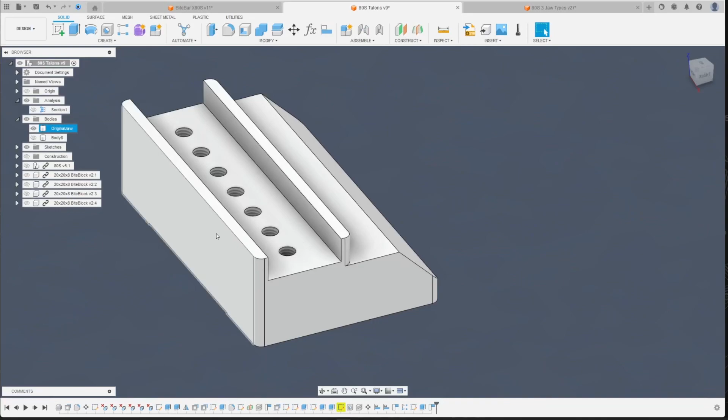So what did I do in preparation? I put in my jaw model because my origin is the vise. G59 work offset is what I use, and it's basically here in the middle of the vise, and this is Z, so it's on this plane right here. So that's why I always model in the jaws. This makes it much easier to avoid cutting into the jaws, because that's why I'm making these jaws, because I did that a couple of times. So I'm trying to learn a better work process.

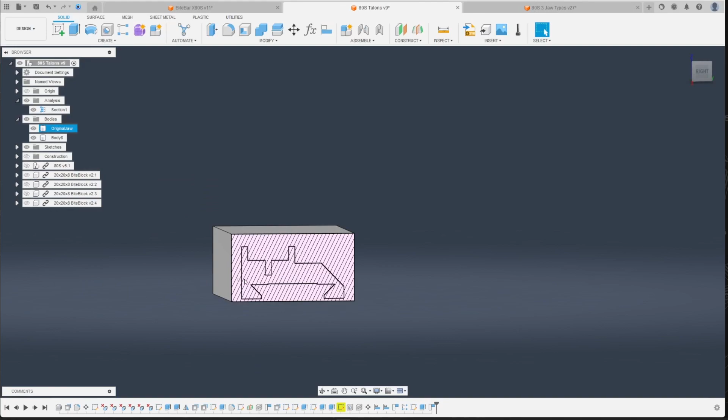And so I put in my jaws and I modeled the stock that I'm going to be using like so. First op is going to be from this side, so this will be Z0. Like this exactly is going to be op 1, so Z goes up. This is going to get faced off, this is held down by like 4 millimeters, and these jaws need 3, so that I've got some spare room there. I aligned these so they sit correctly against that, and that is it.

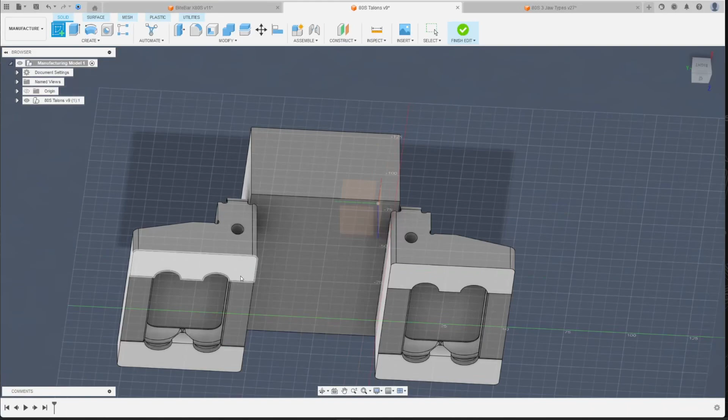So let me pop into Manufacture, and I'm gonna show you my process of how I do this. First I know this will require 2 ops, so I'm gonna make 2 manufacturing models. I'm gonna edit manufacturing model number 1, and I'm gonna get my origin here. I always start a sketch on the face here, that's the precision face basically. Then I project these 2, draw a line, point in, oh, that would actually be wrong, find the middle, boom, done. Finish sketch, finish edit. We've got model 1 done.

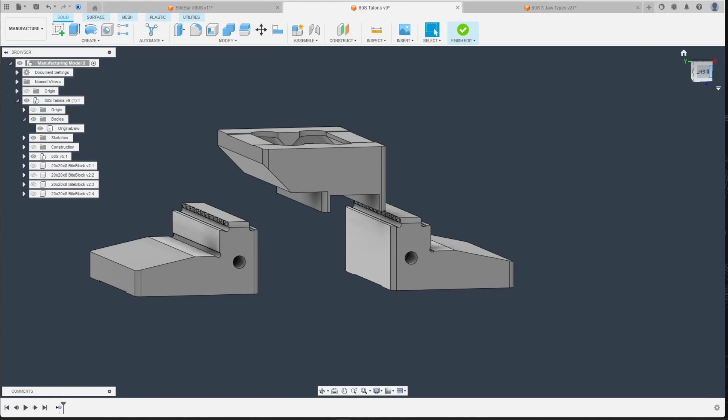Let's go into model 2, edit that, and now here it starts to get more involved. We're not gonna be using the stock, so I'm gonna remove it completely. I'm gonna work with in-process stock, and don't move this model. The model has to stay at the same spot, otherwise that's not gonna work in between the setups. So I'm gonna take the align tool, and align the jaws to here, and now they're gonna be 0.3 millimeters off, because this surface is lower than this, and it's gonna be sitting on this, so that's not gonna be correct, but I will move that later.

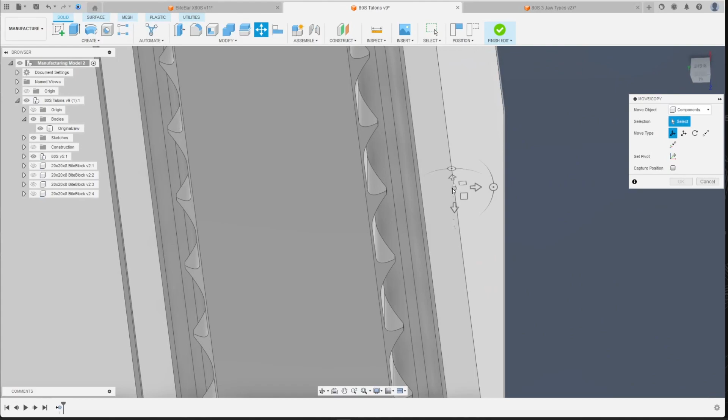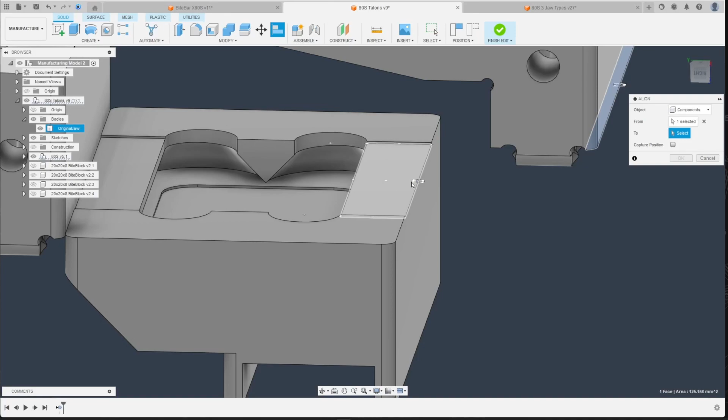So I'm gonna align these. Actually aligned that wrong, okay, sorry for that. Let me just quickly move this. Why is it so weird? Give me a second. Oh, sorry, I picked the wrong tool. I didn't pick align. That's why it was acting up. Little tip: if you hold Alt while selecting, it makes it easier to select these spots where it might pop into here. It doesn't work as well now that I'm showing you, but it usually does work great.

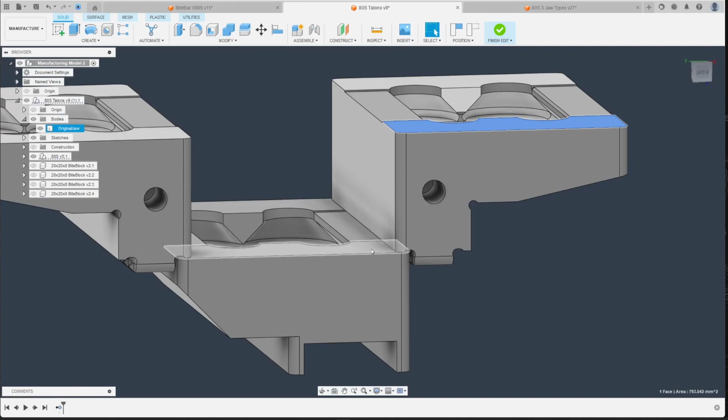Since there's going to be some heavy roughing, and I don't care about the surface of these much, I was going to hold them in the serrated jaws again. Actually, scratch that, sorry. I'm going to hold these on the smooth side. We've got 20, so we need to move this 4 millimeters. Will that work? I don't think I'm gonna be able to make this spot. Let me see. I think that's actually doable. Worst case, I change that later. So it's gonna be held like this. There's gonna be a parallel right here. It's a 21mm tall parallel.

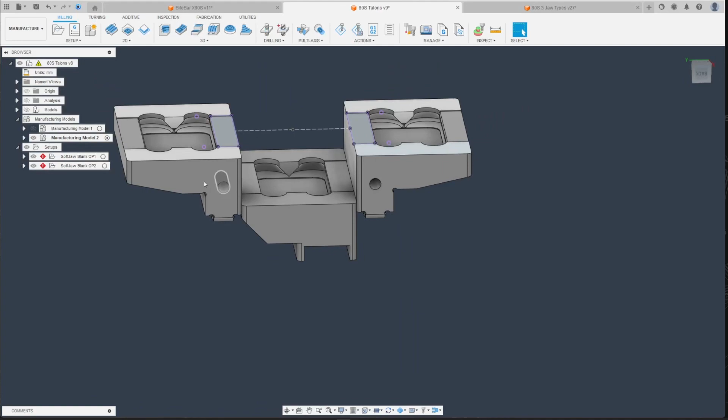Again, I add the sketch. I project these, construction line, point in the middle of that, finish, we're done. So that's model 1, model 2. That is the correct way. The model itself doesn't move, only the jaws and the fixturing around it does. And let's pop into here. I've already got this set up. I copied it over, but in short, I pick my machine. I select orientation. I go origin, selected point, select the WCS origin.

I'm actually gonna select the manufacturing model here first because it won't let me without it. This usually gets automatically selected, but since I already copied it over, it doesn't. So here we check and it's on the flat bottom of the jaws. That is correct. We select the model, so I'm gonna have to get this like so.

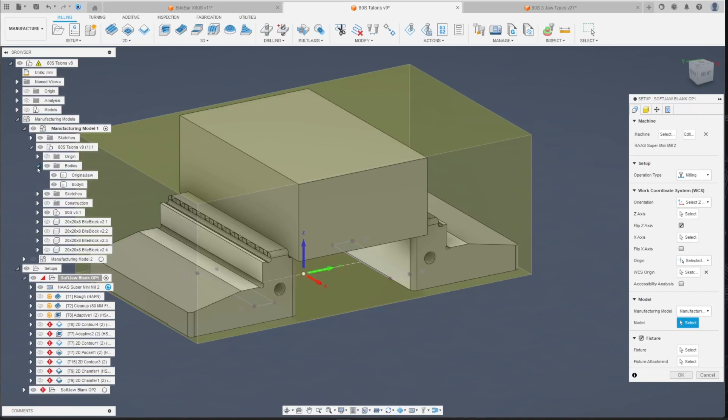We do from solid, so hide the model, select original jaw, and then stock. I'm gonna go from solid, select, and I'm gonna select the model stock that I already modeled up. And fixture, we can select these just cause it's better in case there would be any kind of hits with like a drill or something. And then my WCS is G54. That defaults to G54, but I actually had it changed, so I wanted to check. And that's everything. So we do OK.

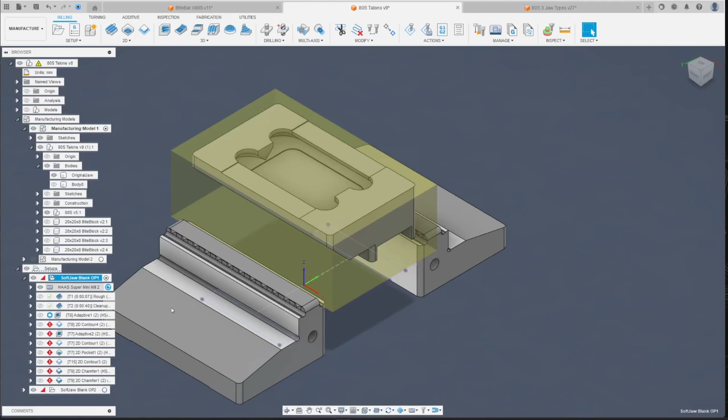And let's see. We've got a ton of errors, but first off, it gets roughed with a face mill, 50mm. It gets cleaned up with a large fly cutter style, just one insert in like a big face mill, 80mm face mill. That makes the surface super nice. Then there's an adaptive with a 10mm tool. Some helix there. Not much more to say.

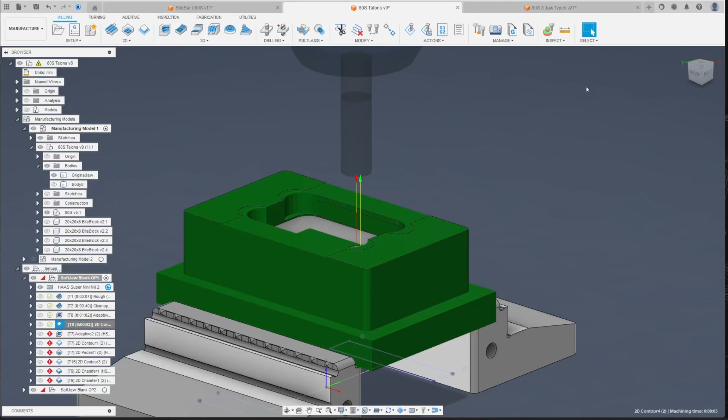Then we've got a contour with an 8mm. I believe that was this one. No, actually, sorry. That's the 10mm tool. That is the outside profile of the jaw. So I'm gonna select silhouette. I'm gonna do outer loops. Okay, see, that will go around.

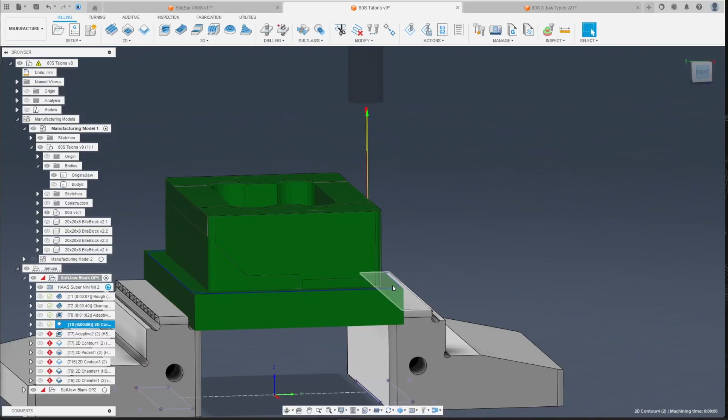I actually do want to change this up a little bit because once we mill this, you can see the depth doesn't go all the way down to the model. So I'm actually gonna change this up a little bit, and I want to set the bottom height to model bottom. I'm gonna do minus 0.5, and hopefully that picked correctly. Yep, that worked. Okay, here I'm gonna do the same. Heights, model bottom, minus 0.5. Done. That will contour beautifully around that.

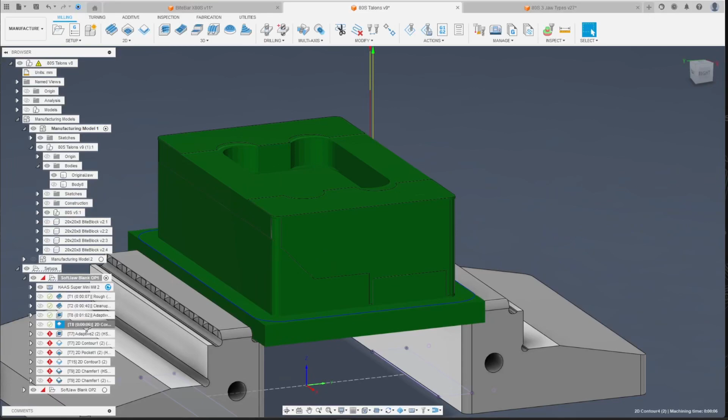So then, adaptive. Oh, right, top reference. I'm gonna select this as the top. I'm sorry I'm going through this fast. Because I already have it set up, I'm trying to not waste much time. But the way I have this set up is so it doesn't try to machine these parts or these flats. I have the top set to here -5, and that also saves me time that it doesn't try to do stuff here.

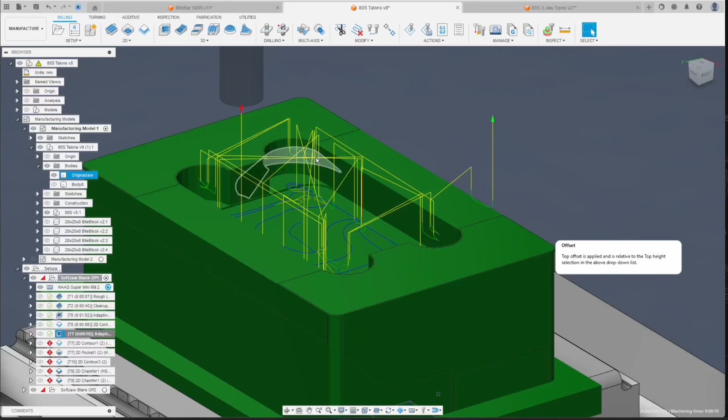Let me actually show you how it looks if I do 0. You see, it has these weird moves around. Like, what the hell is this? Why would you machine this little part? It's completely useless. So that's why I'm trying to keep it under control a little bit by setting the top to -5. There we go. That's a lot cleaner.

If you really wanted to save time, you could do most on the stay down level, and instead of retracting a couple of times, it's just gonna move like this. Might save you a few seconds, but it's nothing significant. Here you can see also there's some weird links and stuff, but I don't care, it doesn't really mess up the part in any way or mess up the surface.

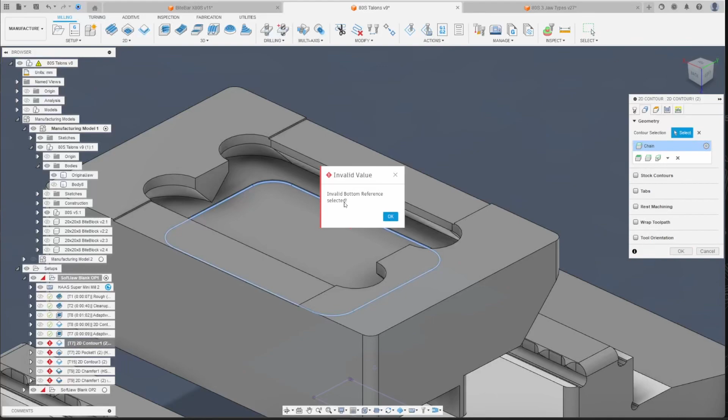So then we have the contour, and that will be this pocket, and the bottom will be this. Actually, I am incorrect, sorry. I know I'm jumping all around this, but I really don't have much of a choice. There we go. So it's this, and the bottom is going to be this spot. Why did it not mill this part? That's weird. Oh, because I did not select it. I'm gonna select close chain here. That's gonna fix it. Yep, there we go.

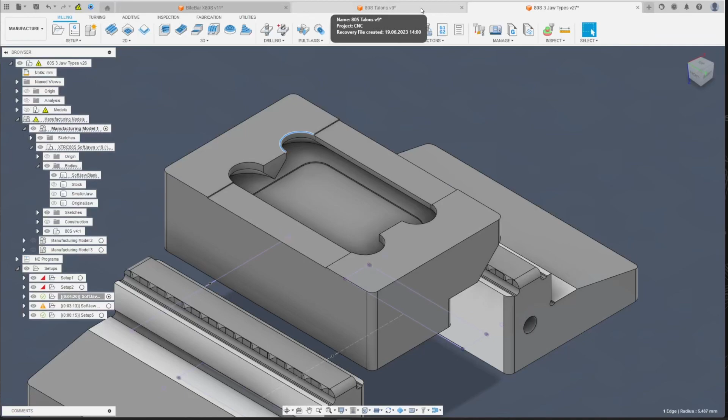That's perfect. Let me actually do a quick check. I've got this 5.5 basically. Yeah, good. That's the CAD for the soft jaw that I've already machined, so I'm just basing it off of that. Okay, then pocket, I'm gonna select this. I'm gonna also check, because maximum step over is 4. That is stupid. I'm gonna set it to 7 because it's an 8mm tool.

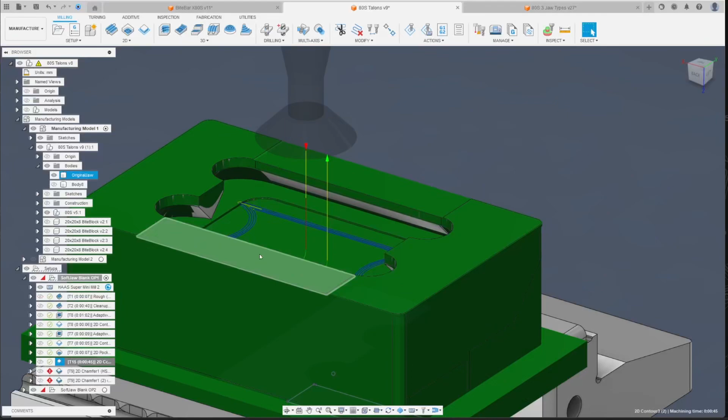I think it touches the wall slightly here. I'm gonna have to watch the simulation later. But I was setting the step over wrong for pocketing. And then we have the interesting contour here. I will show you that in the simulation in a second as well. And we've got some chamfers. I believe they were something like this. Okay, guess that's why I split them up, right?

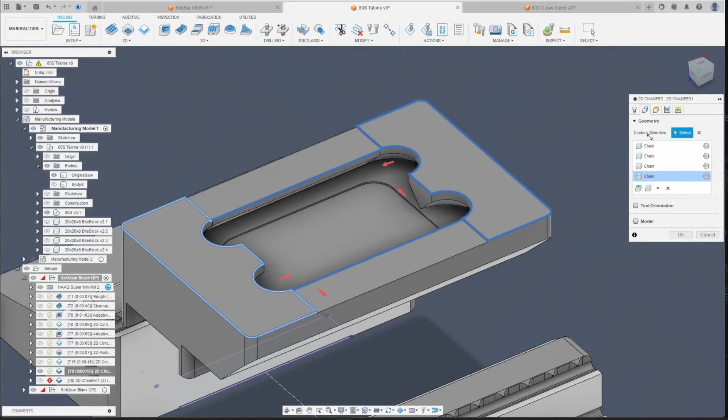That's a very big chamfer. Let me check really quick. Sorry, I'm running around so much with this, but I am trying to remember because I haven't had this file open for ages at this point. So this is gonna be the outside chamfer. Don't do that. Okay. Sometimes Fusion doesn't want to listen, so you gotta, you know, kind of force it into listening, like so. That should do the chamfer correctly.

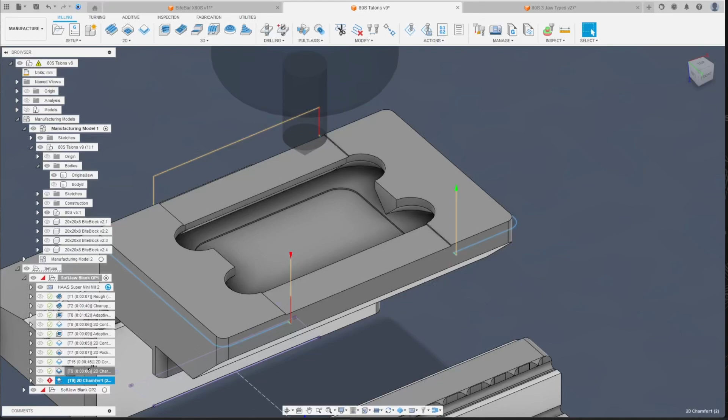Yep, that's good. I will do the small chamfer on this whole thing, basically. Let's see what Fusion thinks of that. Yeah, that's what I expected. It's fine. It doesn't matter much. End mills don't leave much of a burr. So let me show you the simulation because I went through that very fast. So I see I've got some collisions, but I'll show you.

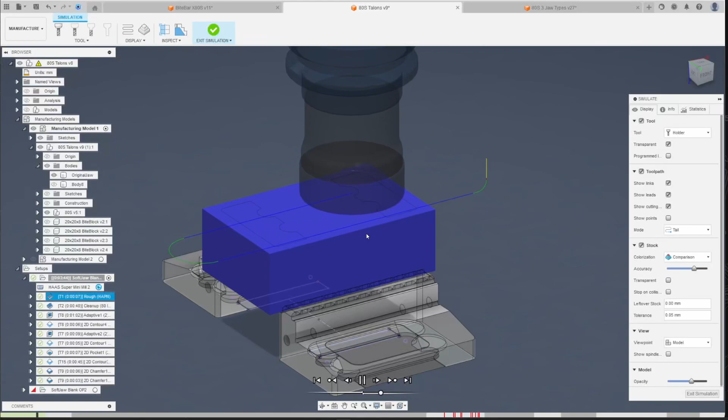So here's my facing op. It's just like a very small depth cut. I'm not sure, I think it's like 0.5 millimeters or a millimeter. So not heavy at all. 7 seconds, easy. And this is the cleanup. I'm leaving 0.1 millimeters from the face, and that then gets faced off like so.

Then I have the adaptive with the 10 millimeter tool. That's a fairly heavy cut. It's 15 millimeters depth of cut, and it's 5 millimeters width of cut. So that's pretty solid. It sounds amazing though. This tool has been seriously great. And as you can see, this is still not finished. I have stock to leave set on there, so I'm gonna speed this up a little bit because it's gonna take a second.

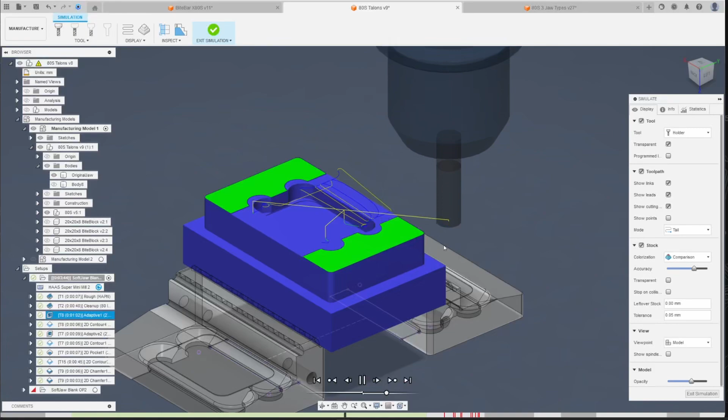See, there was this weird non-cutting jump. Then it does the full depth. And okay, let me slow down here. Why is it saying the shaft collides? Oh yeah, I got it. Oh my god, that is a solid 0.5 millimeter of collision. I'm gonna change that in a second. Let's say that went well. It probably wouldn't have, but I'm gonna change that once we finish watching.

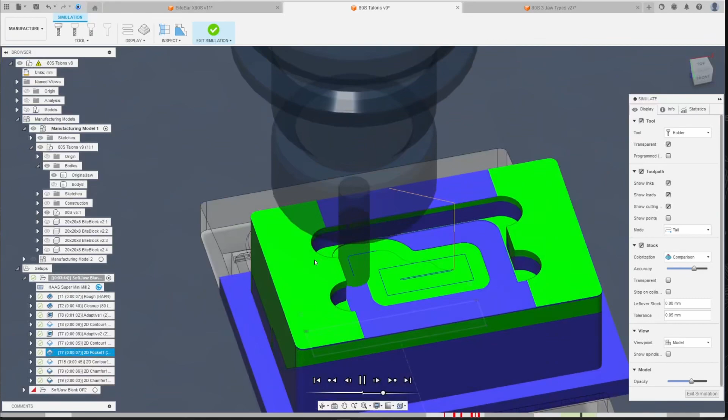So here I'm doing a little adaptive that clears out anything that the 10 millimeter left behind, and then a contour all around this. Then a pocketing op. It's gonna slightly hit that, but I think that should be no problem. Okay, and then this crazy thing. Don't get inspired by the way I did this, because I am sure it's wrong in many ways. Let me pop into the op again. I got kind of messed up.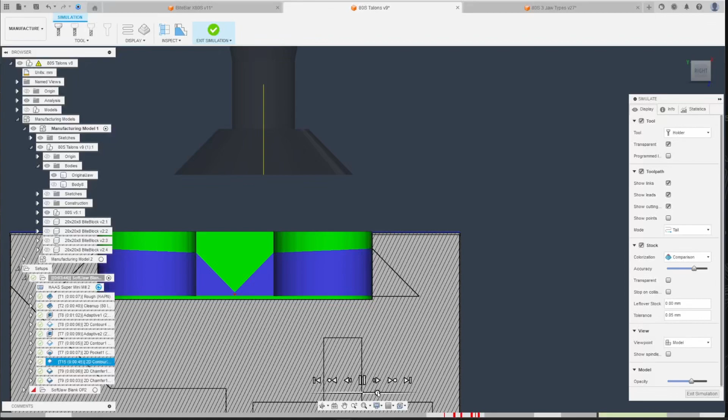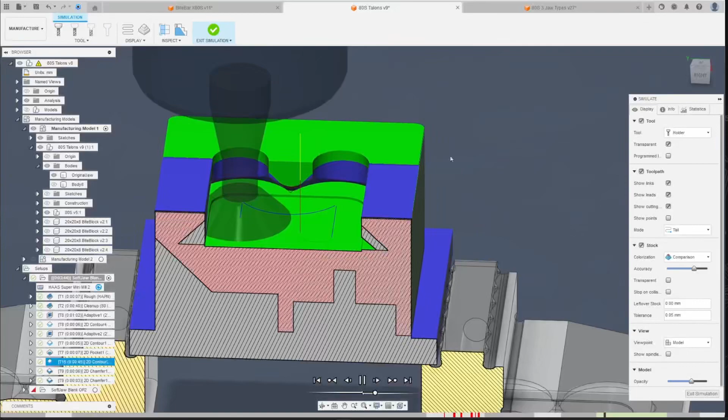I'm gonna do a section analysis. I'm gonna set it to half of that. Let me turn that on. Okay, so check this out. This thing here goes down. Jesus Christ, why is Fusion so laggy today? And then it starts cutting like so. Just fairly small step over. It's not crazy, but here you can see it isn't the best for the tool to go straight into a corner. So I'm slowing down the feeds. I'll show you how to do that in a second. In these corners, I slow them down, and it does a couple of passes. It's aluminum, so I can afford to do stuff like this, which is pretty stupid.

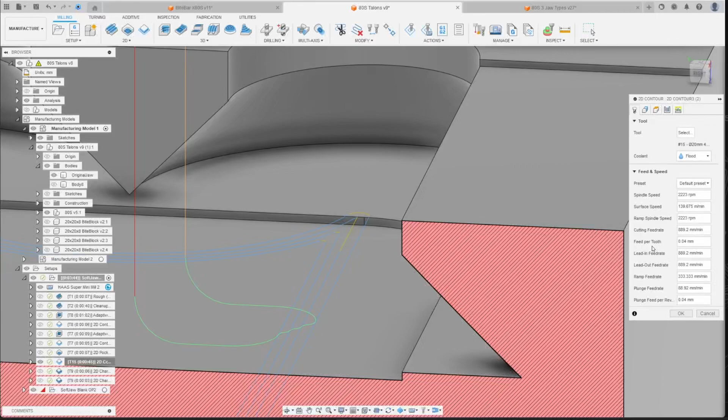I'm actually going to do a little edit, I believe. I could add a few roughing passes because I want to have it cut air. So I've got two things to edit here first. Let me show you. I'm going to add a few step overs here. And then feed optimization is what I was talking about. The little yellow corners: the regular feed rate is 890 millimeters per minute, and it slows down to 600 in the corners, which is fairly helpful, because when it's being very bogged down, this really helps. I have a slight amount of stock to leave because I had to set that to make it do it accurately. Let's watch the simulation now to see if that helped.

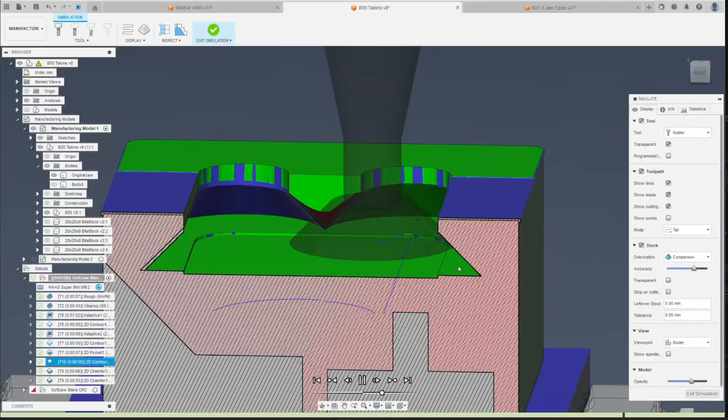See, the first pass is always a little painful, but I do believe that helped a little bit. These subsequent ones are very small. Just the first one is pretty heavy. And here's the finish one. And see, it says it left this here. Super weird, because I know for sure it did not. So yeah, this might be just Fusion being weird, because you can see this angle. Fusion doesn't say it's a 45 degree, but I believe it is. It won't tell me. What's the angle between these? Okay, whatever. I know it did turn out well, so that's just an oddity.

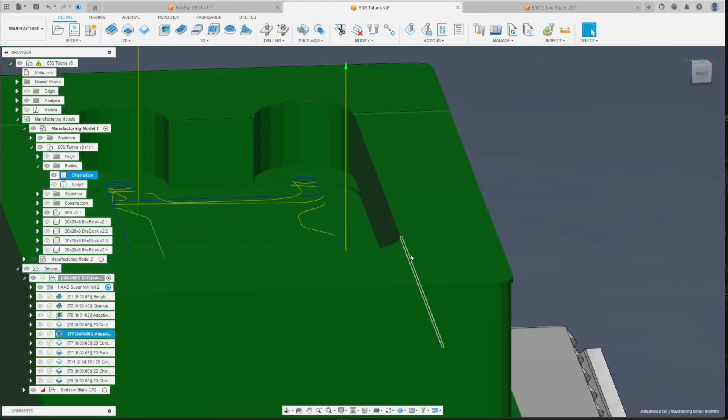And I want to change the contour around it. It's gonna clean it up. I'm gonna do it in multiple depths at 15 millimeters each. So that should do 2 passes. Yeah, that's great. We'll turn off analysis. Let me redo the adaptive here. And now the sim is done. Let me watch it. So, face top, clean up the top, adaptive with a 10 millimeter tool. Do the inside as well, roughly.

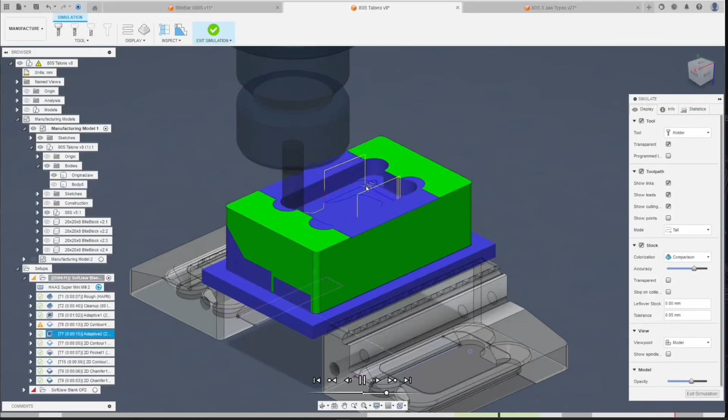I do think I have one operation I missed. We will see in a second though. Okay, the contour works perfect. This adaptive cleans up the corners that the 10 millimeter couldn't reach. Pocket, dovetail, and then 2 chamfers.

Yeah, as you can see, everything is machined except this, and I seem to have somehow managed to change something with this tool, the way it exits. I'm gonna actually make the vertical lead-in distance and radius 1 millimeter in an effort to save that, which didn't work. Okay, it's the lead out, so I'm gonna change this to not be same.

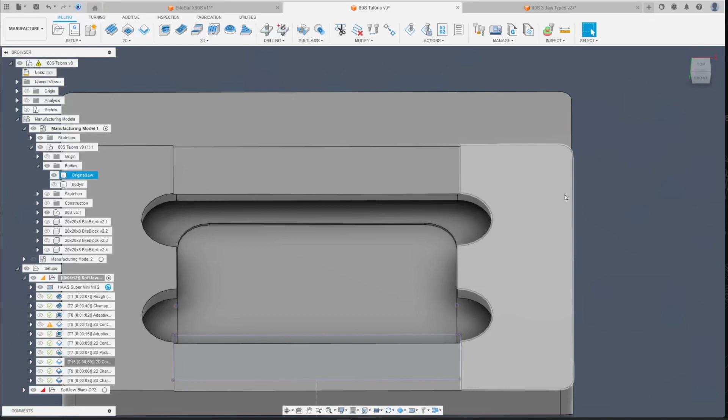I'm gonna do perpendicular maybe. Yep, now it hits this. I am going to, let's try 0 degrees. Yes, that seems to be fairly okay. Yep, nice. Okay, so that's fixed, and I need to do a little pocketing up on there, and I'm not

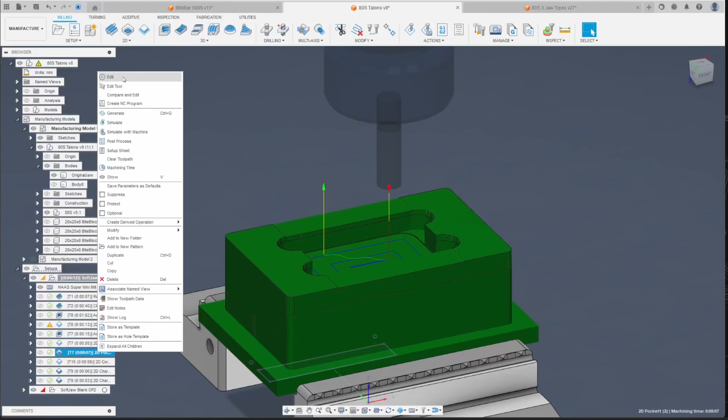sure why, but I think it might have been selected here. So let's do it here. Yeah, that is it. I saved a lot of time reprogramming it now that I know more of how to program this stuff. Let's skip over. We seem to have no collisions, at least Fusion tells us we don't have any.

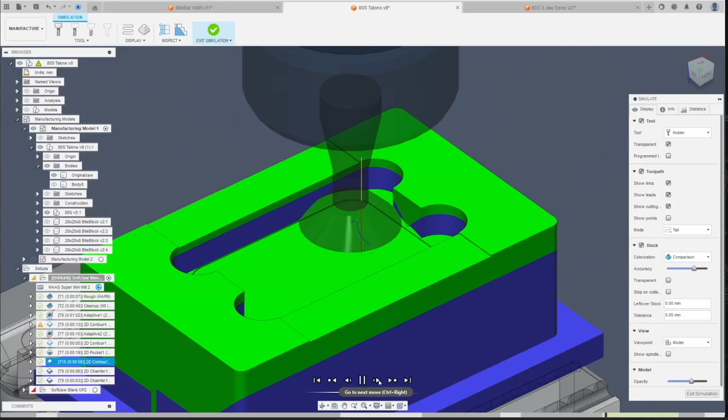Nice, that'll just face it off beautifully. This should work without touching anything. Let me actually watch this. I usually watch this at fairly slow speeds, but right now, because I've already programmed this, I don't need to be crazy careful. But let's see how it exits, because that's going to be important.

I'm actually going to do this instead of the holder. I'm going to do shaft. This is super handy to use. I also always basically run in comparison. I never ever use any other stock colorization mode. It's gonna cut it like that. We're getting close. This should be the final. Yep, that's fine. Tons of clearance around that. Okay.

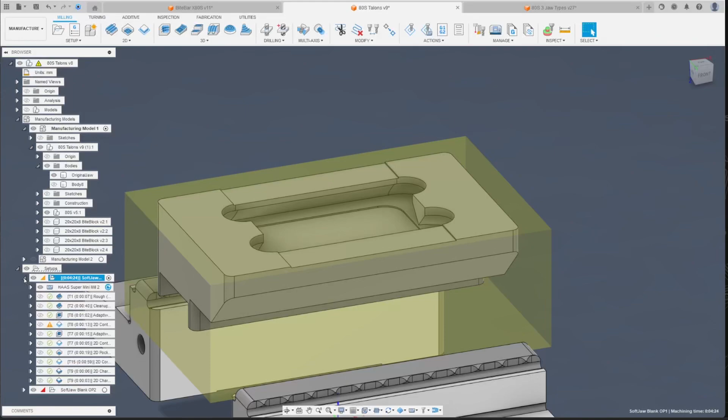Good, so that is basically the first op, and now the second. So let me edit the setup. I will do manufacturing model 2, okay. Model, select my model. Origin, selected point, select WCS origin. This is how it's gonna go in the jaws.

Stock, I'm gonna set to from preceding setup and continuous machining checked. It will say, hello, I cannot verify that the stock is transferred correctly. I want to ignore that, okay. And let me just quickly generate these. You press Control G to regenerate it.

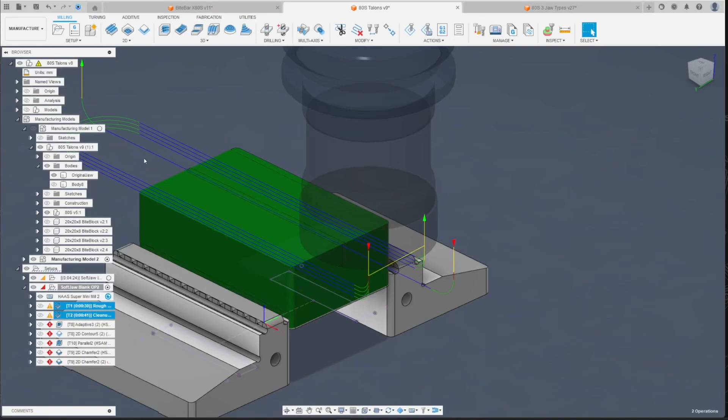And we've got an adaptive that is, for some reason, yeah, right, okay, so I'm gonna set some of the bottom heights that are unset right now because I copied it over. I am very interested in how this will turn out. What was the contour doing? I believe it was this.

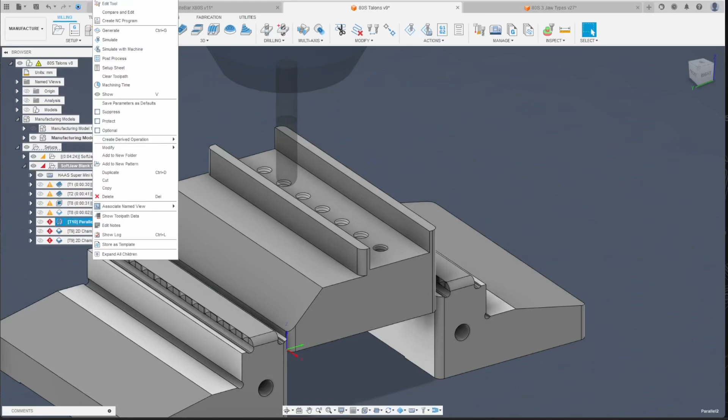Okay, parallel, touch surface this, okay. Another invalid bottom. I said 0.1 or something crazy. How's that gonna look? Oh, that's decent. I think I have a chamfer up here as well. Let's see, that's 0.25. That was this. Then I have this chamfer, which is 0, and I set it just for this line.

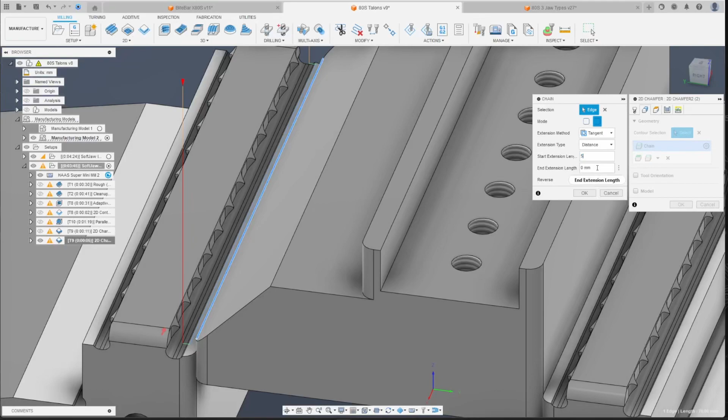That is like crazy. Look at this. I'm gonna have to add some extra 5mm or so on here. Passes, finishing overlap. Wait, it's not finishing, sorry. It is in here. If you edit this, you can do a start and an extension, like so. Let's watch this, because this is how I did it before. It's absolutely insane, but it works.

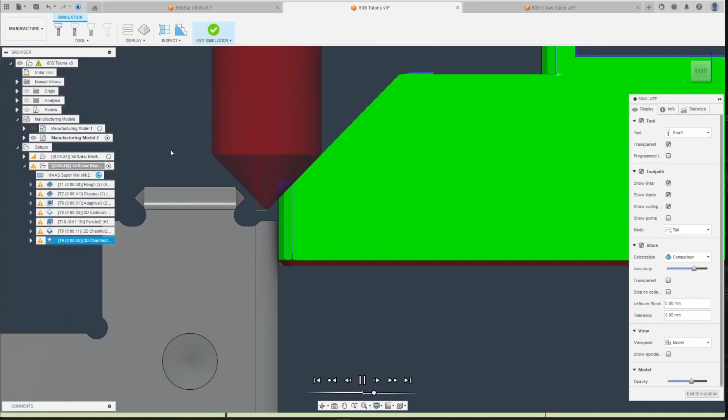So you'll see. It's crazy. Yeah, you basically go like this. Just like 0 clearance, and just clean that up. Boom, done, easy. It never collides, which is amazing. I think I'm gonna do this ball at a larger step over. I'm gonna do 1mm, save some time.

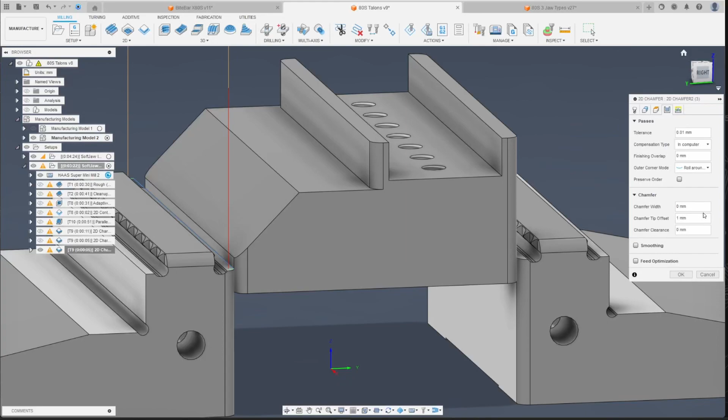It's gonna make this surface kind of ugly, and I'm gonna do the chamfer, and I'm gonna move it up here. Let's try to do it this way. So I'm gonna take the chamfer, I'm gonna keep this selected. I'm gonna go into passes, chamfer width. Let's do, oh, this won't work. This won't let me adjust it.

What I'm actually gonna do is I'm gonna go into the manufacturing model, I'm gonna make a sketch, and I'm gonna do a rectangular pattern of this line going down. Let's make like 3 or something. That should work. And then if we go into the chamfer and we select these, theoretically that should work, right? Okay. Judging by the passes, that seems to work.

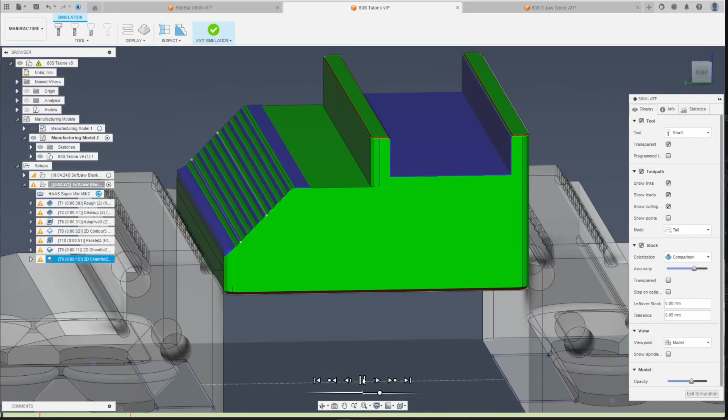I'm gonna have to move this up. The simulation sometimes isn't very accurate, so I'll actually show you this. If I simulate the parallel as well as the chamfer, it should show it better. Yeah, that's basically what I'm going for. Let's pop back into the manufacturing model. Edit this, edit this. I'm gonna set to -4. Actually, -5. Should be good.

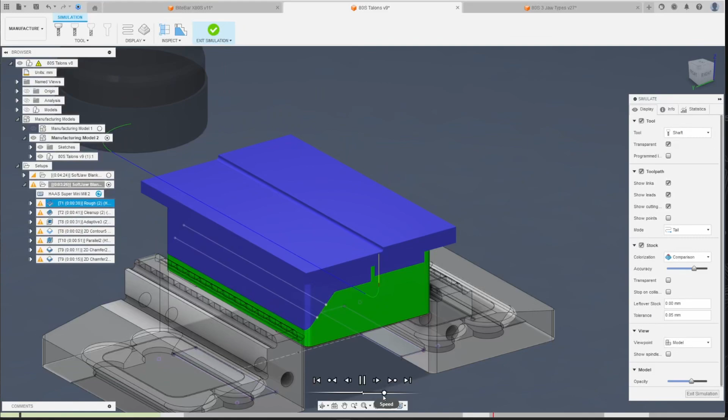I can just regenerate this. That should take care of the whole thing. Okay, let's simulate the whole thing now. So, we will rough the top. Because I'm using the smooth jaws, I think I'm taking just a 1mm depth of cut. I don't want to overdo it. I've had stock move on me, and with the face mill it's not very comfortable. Then cleanup. Adaptive, again 10mm, my go-to rougher basically.

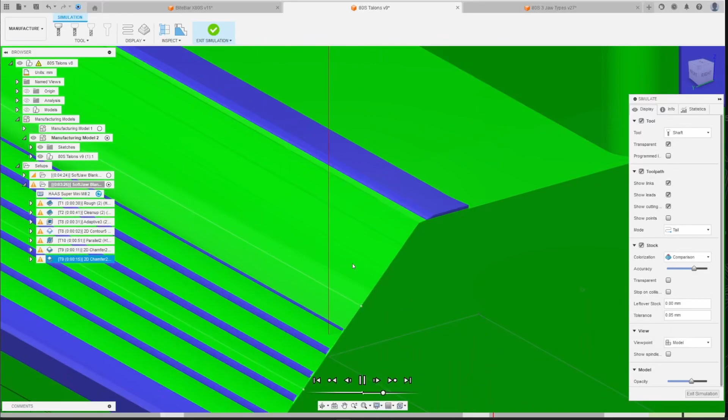We'll rough out the slot. I'm actually going to finish the slot in a separate operation. And then it will rough out this. Okay, I can see that this isn't finished, but this seems okay. And here you can see there's still lines on it, but very, very small, if any, so that should be fine. Yeah, the chamfer tool in 3 passes is gonna just do this.

That is perfect, basically. I'm going to edit it, and I'm gonna do a couple of things. So, first things first, I'm gonna delete this contour. I'm gonna hide the sketch so it doesn't confuse us. And let's work on this. I need to drill the holes, I need to make the slot, and I need to probe the slot so it's accurately exactly 20mm, which it won't be by itself.

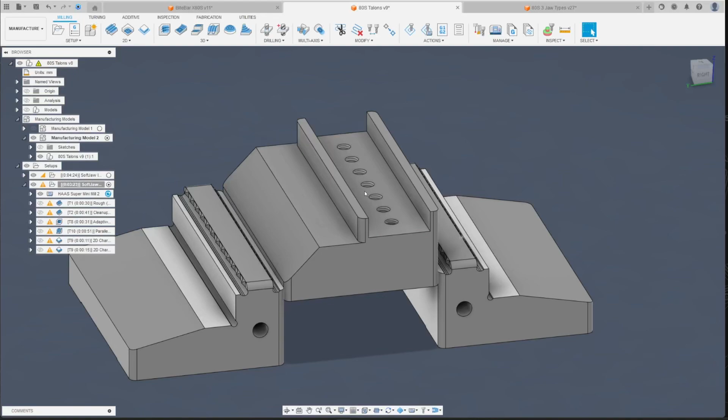So what I'm gonna do is I'm gonna start with a pocket. Let me show you my tool library. There we go. So I'm gonna use the 10mm, I guess. That should be perfect. And I will select these 2 pockets. Let's do OK. Easy. Let me actually quickly set this to the correct step over, not 5, but let's do like 8mm or something crazy.

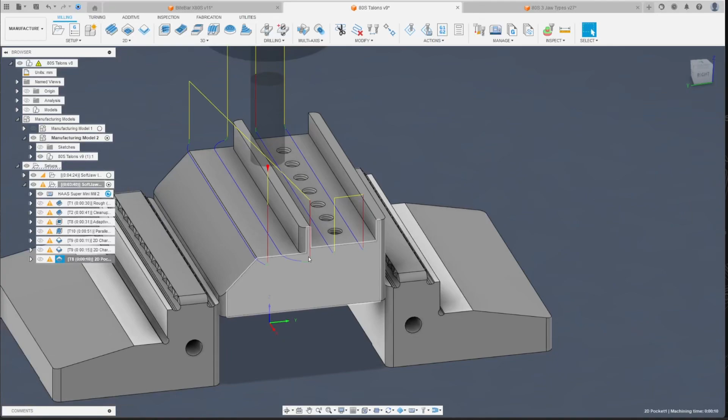There we go. And I will do stock to leave. Radial, I will leave 0.5, and axial, I will do 0, because that's going to be cleaning up the bottom face. Done. Then I will do a contour with the 10mm. Pocket, contour. I'm gonna reorder this in a second, just give me some time to clean this up. Okay, so another contour, I just duplicated that, and I'm gonna do this and this surface.

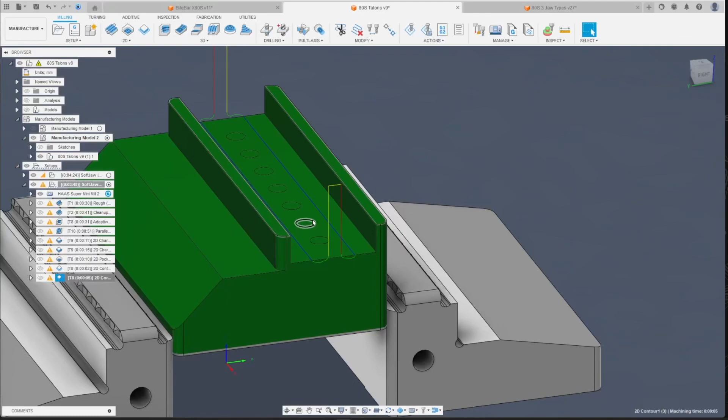And I'm gonna do an important thing, and that's here. I'm gonna set compensation to wear. Let's do OK. Actually, there's one more thing I want to do, just in case. I will do 0.2mm stock to leave on the walls, so that will still have some material left over. You can see there's some extra.

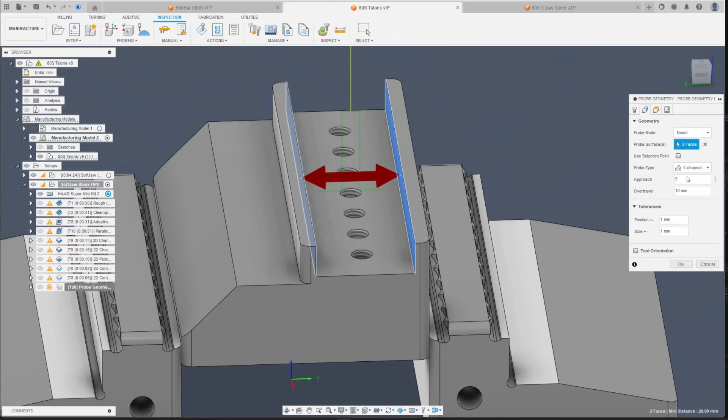Then we go into inspection. We do probe geometry, and we probe this. We go update toolbar, select this contour, do OK, select my probe. Actually, it selected its channel, which it isn't, and it's giving me an error, which is the approach is too big, so I'm gonna set it to Y channel without island and do a 5mm approach. That should be correct. And then we duplicate this and we move it under the probe geometry. And we change this to have 0 stock to leave.

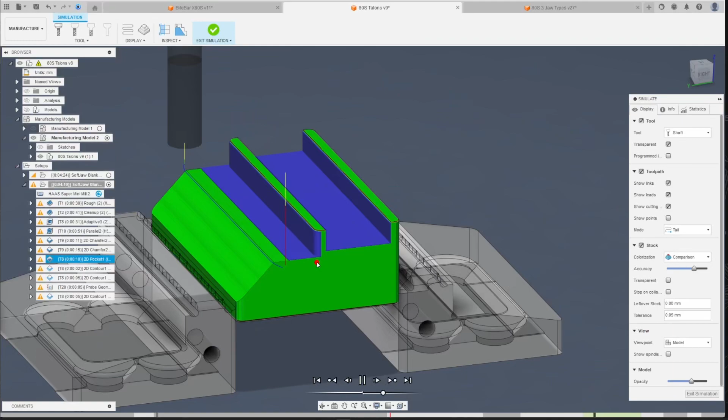So, kind of speeding through it, sorry if it's confusing, but it's already a 30-minute video, which is insane. So let me jump through and show you. So, ignoring the chamfers, here we go. So here's the pocket that we just programmed. Super simple, just pockets, leave 0.5. Then here we do another pocket, just again leave 0.5. This will cut it to size because we don't care about precision. It doesn't have to be exact.

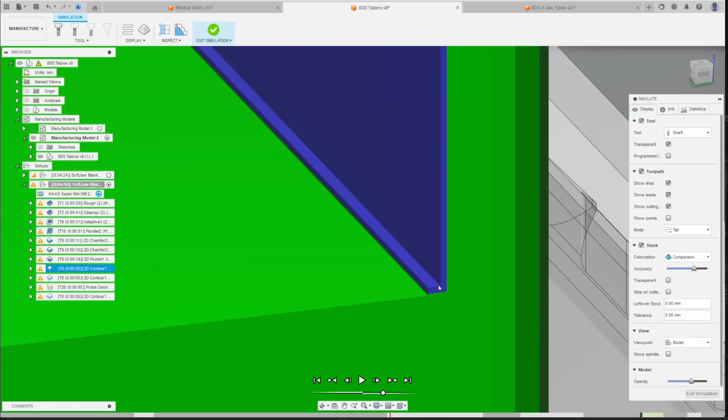And then I'm actually doing something wrong here because check this out. We have before the op. Oh, I'm sorry, I'm pressing the wrong button here. We've got this step, so that means that this is 0.5, this is 0.2 or something. So this adaptive should have 0.5, 0.2 at the floors, for example. Then if we click on the pocket, once the stock in process loads, you can see that there's no step. So we just fixed that.

I'm gonna set this to 0.3. Actually, sorry, that's the pocket. That's not what I wanted. The contour has to be set to 0.3. I think I've already set it at that, so let's check it out.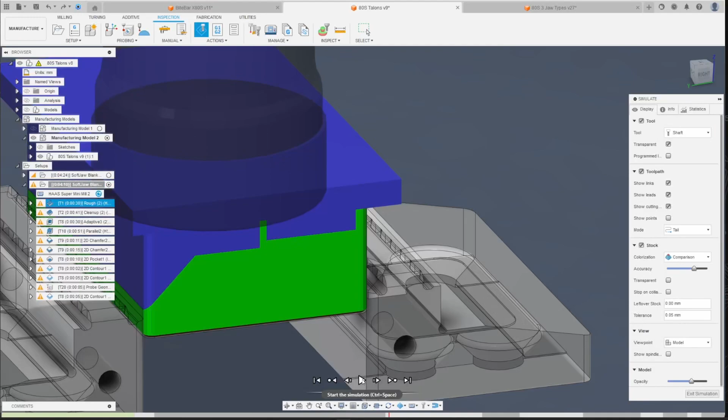Jesus, Fusion is laggy for me today. I guess it's because I'm recording. PC isn't able to keep up.

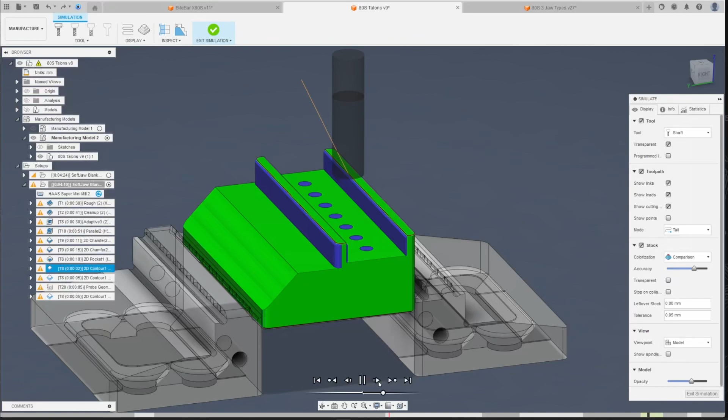So face, rough, ball, chamfer, chamfer the big surface, pockets. Yep, that seems about right. Then contour this. Then contour these slightly. Yep, leave some stock. Great, that is perfect. Then we're gonna probe. It's gonna tell us on the control. You'll see that once I post the CNC part of this. And then we just do the contour to exactly 20mm.

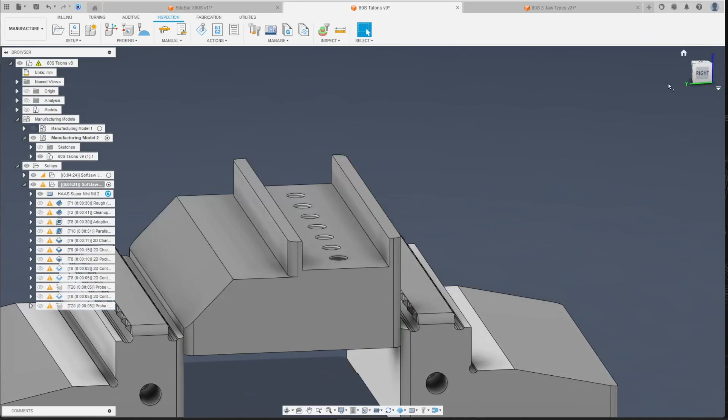What we can do is we can do another probing pass here to probe this again. Y channel, and we're not going to do anything, we're just going to let it tell me what the size is in case that isn't correct. So now let me just do one quick change, and let's do the chamfers last.

I'm gonna do it like so. I don't necessarily need to do ball tracking here, I could have just taken it with the chamfer tool. But let me show you how it looks, it has solid steps. I don't want the tip of the tool to have to cut it, so that's why I rough it out with the ball and then chamfer.

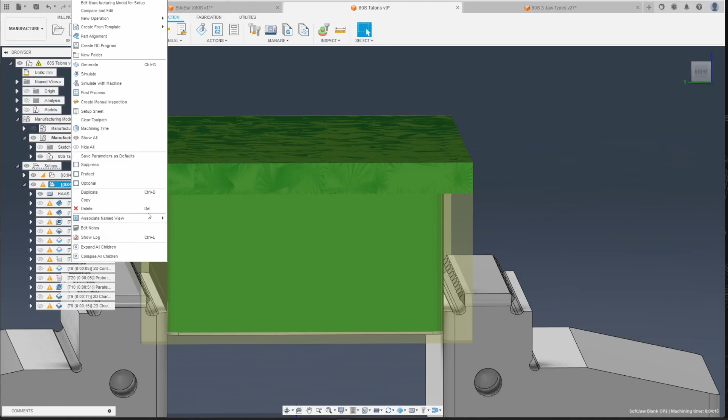I would like to also have an optional stop. Let me learn this - should be manual NC, optional stop. Let me quickly read if it's... okay, there's a lot of stuff. Let's do optional stop then, right after the probing, so I can change if I want to. We'll see, that's cool, never tried this.

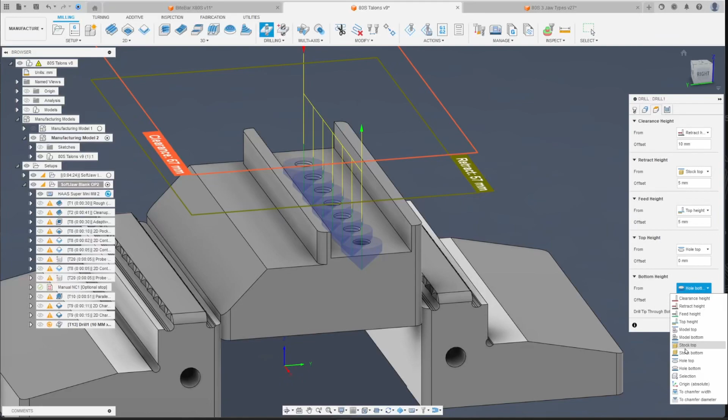I'm just missing the drills and tabs. Let me go into milling, let's do drill, like 10 diameter. Because this has to be fairly consistent, I'm gonna spot drill it, which I usually don't do. I usually do bottom height to chamfer width 0. Boom, it's gonna just do a big divot, however you want to call it.

And then we do drill, select same diameter. What diameter is that hole actually? Does it tell me anywhere? What is the diameter? Ah, it's 5 millimeter, right? 4.2, yeah, so we need a 4.2 drill, which I don't currently have in the machine or library, I think.

Let's just set this up, I'll change that later on. It should be to the correct depth, and then we'll do drill.

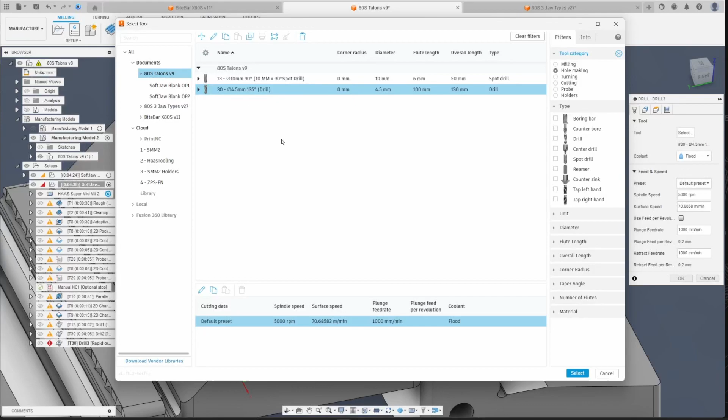We're gonna do a tap. I'm gonna save myself some time, I'm gonna tap this because I'm gonna be making a couple of these. M5 tap, 3 flute, 5 millimeters in diameter. I'll leave it roughly the same thread pitch.

Let me actually check M5. Let me quickly Google if I'm correct on the standard. I think it's 1.5 or 1 millimeter or something like that. Actually it's 0.8, okay I'm wrong. This is important to set up, very important actually.

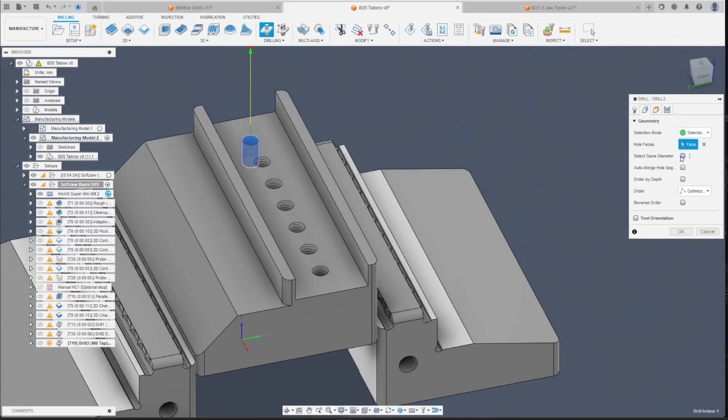And the rest can remain the same. I always tap at 1,500 RPM. I'm gonna set this to be tool whatever, 19 or something, and select that, and do OK. Actually I need to pick this, select same diameter, done. And that's it, really.

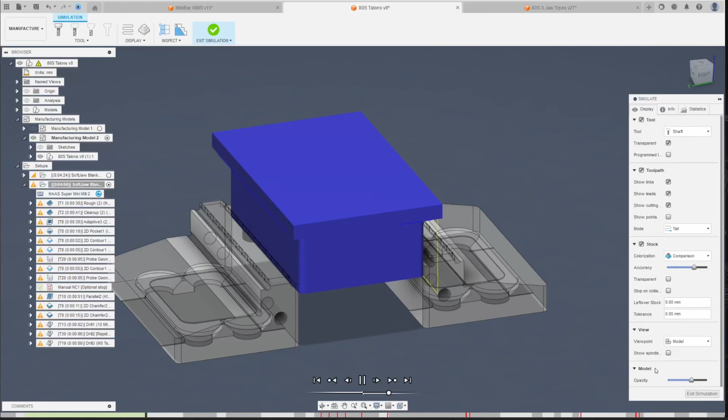Let's do a little thing I do - I always click on all setups and do simulate. It's gonna tell us a lot of collisions, but this way you get the most accurate in-process stock model possible. So you can then view the whole thing, disable the model completely so we can take a look around it. I also usually just run it at some higher speed, but not skip over, because this forces Fusion into doing the absolute best quality.

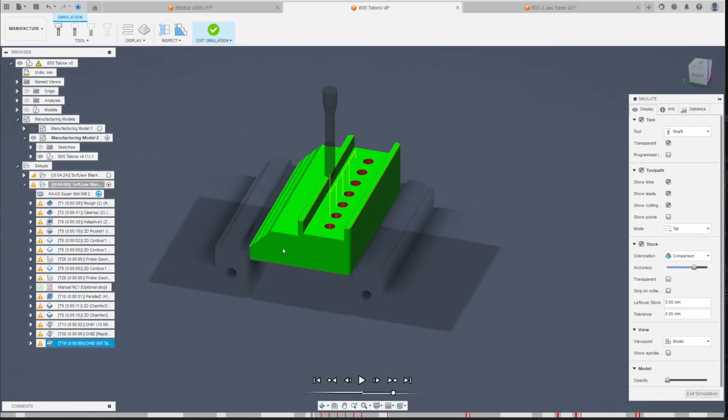And you can see there's not a single face that would have anything left over except this little burr, but I think that's going to be fine. Yeah, chamfers all fine, holes are fine, this huge chamfer should look great. Nice. That's it, that is actually it.

So then I would just post that over, and yeah, that's how I programmed it. That took me 37 minutes, a lot longer than I expected. Hopefully there's somebody that uses this as a podcast or something to maybe learn a little bit from Fusion. Granted, I'm not that experienced, so Jesus Christ, time flies.

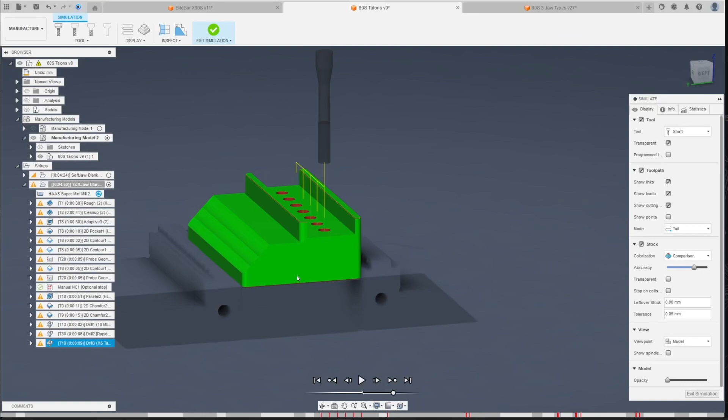Yeah, that is the jaw, and that is part 1.5 of this series. It's not essential to watch this, basically. So if you just did, thank you for listening to me blabbering about I have no idea what. I completely lost track of time. Anyways, that's the part, and we're gonna see how that turns out if I messed up anything.

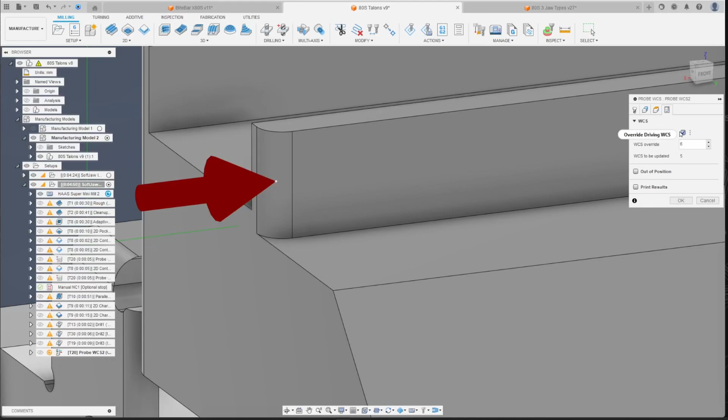I do know one more thing I want to do before we end this. I don't have any probing set here. So right now the Z height is fine because that is set correctly, but the x-axis after facing, that needs to be set. So what I'm gonna do is setup probe WCS, I'm gonna tell it to probe somewhere like here, and override driving WCS, override 6. I do actually wonder... okay, oh good, that's gonna just probe here, and that I want to do after the face.

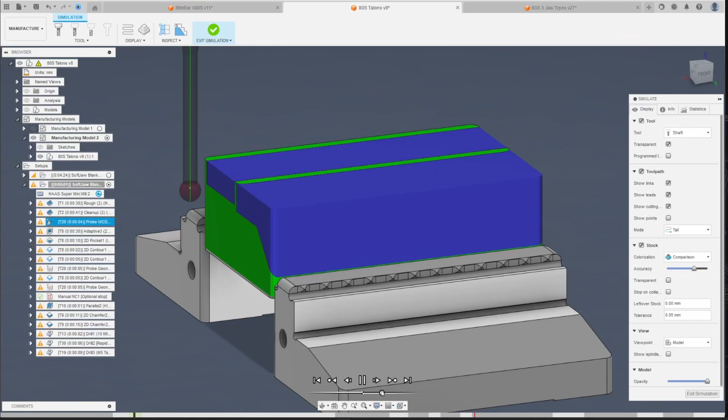So now if we regenerate it, it's gonna face it, it's gonna clean it up, then it's gonna probe the stock that's been machined before, so that's gonna align it exactly how it should be aligned.